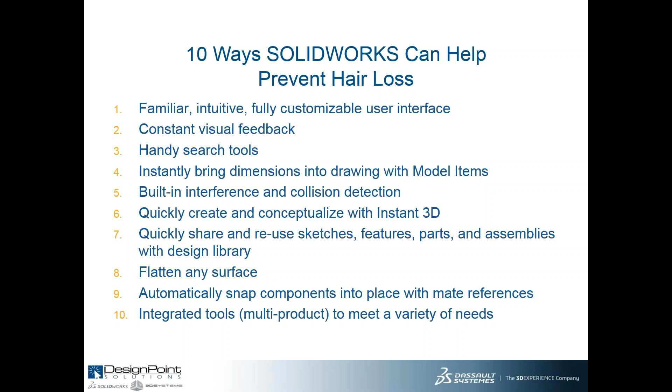Bring dimensions into drawings with model items. There are built-in tools for interference and collision detection. And you guys can see the rest of the list and get the gist, right? So just ways that SolidWorks will make your life and job easier and help you work more efficiently with respect to CAD design.

For the purposes of today, Loretta's going to dive into a few things on the technical side, but basically what we're going to be doing specifically in SolidWorks is, as far as part design process, Loretta's going to be designing a bike pedal. The next step is she's also going to document that bike pedal, and we're going to create a 2D drawing. And we're also going to insert that bike pedal into the assembly, which in this instance is a bicycle. We're going to use some of the built-in interference detection tools to ensure manufacturability and ensure that this product does work as it was initially intended to.

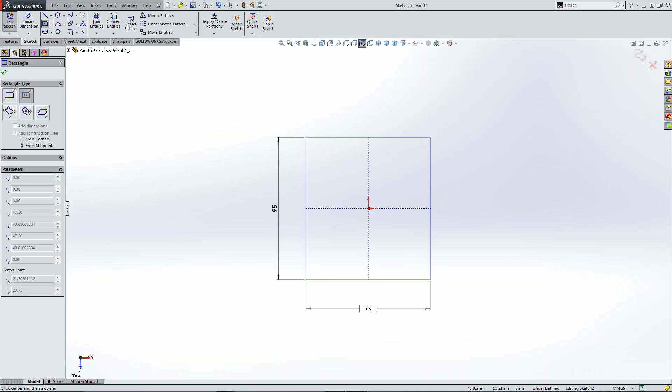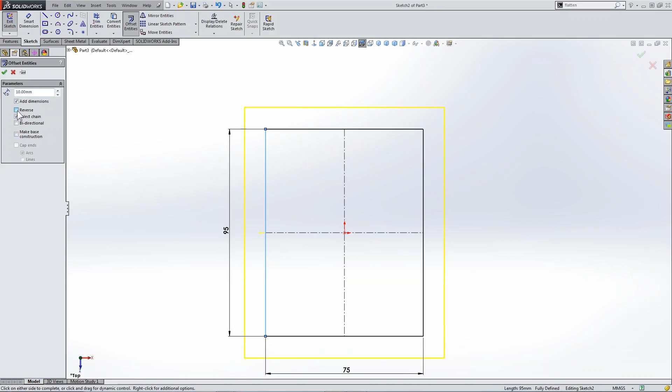So I'm going to add some dimensions to this on the fly. This is going to be a 95 by 75 rectangle, and I'm just going to offset that very quickly. Again, using my shortcut key, I can quickly find the command to offset my entities. I select one, and SOLIDWORKS selects the rest of the entities connected to that for me. You can just reverse that very quickly, hit OK, and now we're starting to build up our bicycle pedal even more.

Okay, so now we're going to work on the middle section of this bicycle pedal. Again, I'm just going to hit my shortcut key to bring up the command - it's a very quick thing to access. And I'm going to add 2 lines in here.

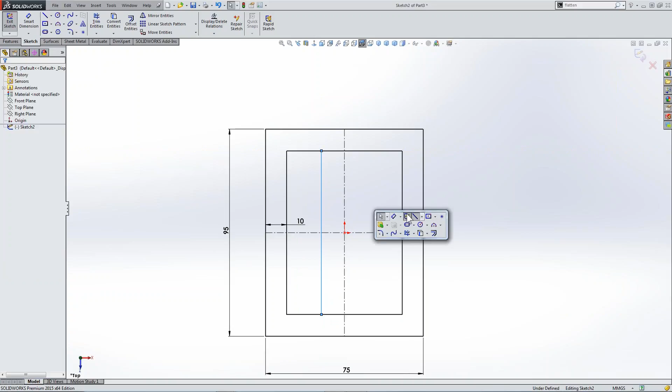Now, as I'm sketching here, you might notice I'm getting some visual feedback - these lines are black while these lines are blue. What that means is that these parts of my sketch are not fully defined. You can see I can drag them around and do all kinds of things with them, whereas these black parts of my sketch are fully defined. So if I grab and drag, it doesn't change. We need to add some more information here to make it fully manufacturable, to give it the information we need.

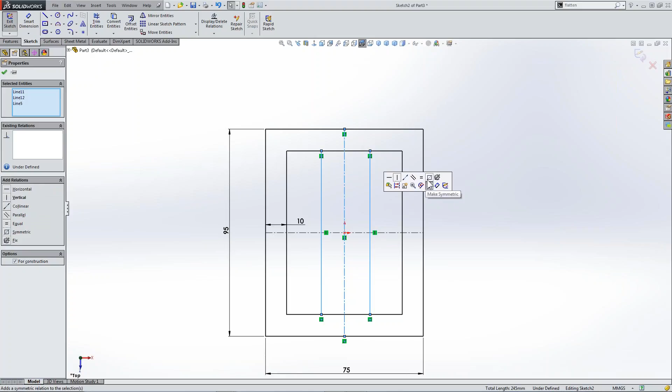So I'm going to just select 3 lines, and I want to make that symmetric. If I select 3 lines at a time, there are these in-context menus that SOLIDWORKS gives us - it's intelligent enough to know that we might want to add one of these relationships to those 3 sketch parts. I'm going to make this symmetric. Now that I've done that, if I drag my line around, you can see that it maintains that symmetry for me. So again, I can very quickly add in those relationships.

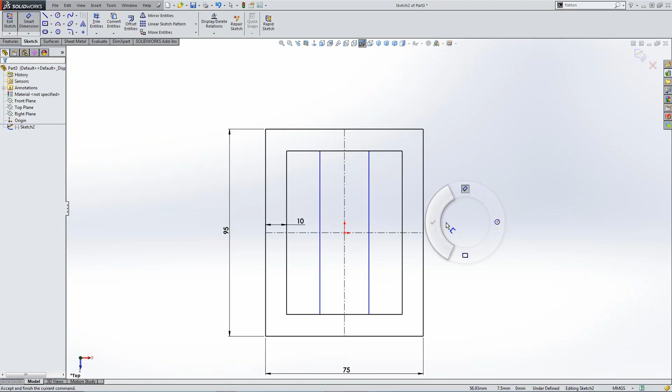The other thing you're going to see during this demo is that I'm using something called mouse gestures. If I right-click and drag up or around, I can very quickly select some of my most commonly used tools - this is my dimensioning tool, which I use all the time. All I'm doing is right-clicking and dragging up, and now I can click on these lines and give them a dimension to fully define them. As soon as I add this dimension, you'll notice parts of my sketch have turned black, which means it's completely defined.

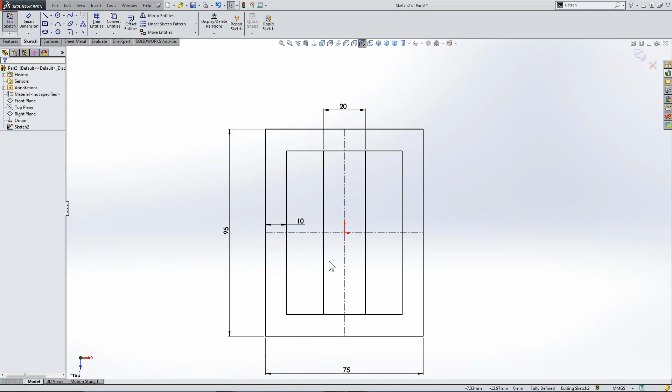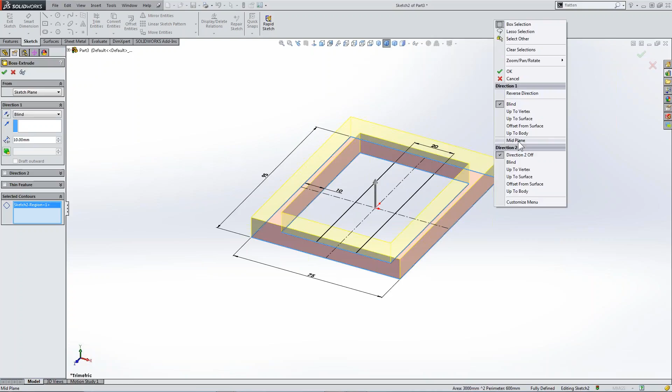Now we're ready to actually move on to give it some thickness. I'm just going to activate my command here, the extrude command. At this point, SOLIDWORKS allows us to select contours of our sketch, which is really cool. So we can select maybe just the outer edge here, and let's give it a mid-plane relationship. Now because we have instant 3D turned on, we can just drag this up and snap it to a ruler so that we can quickly give this some thickness.

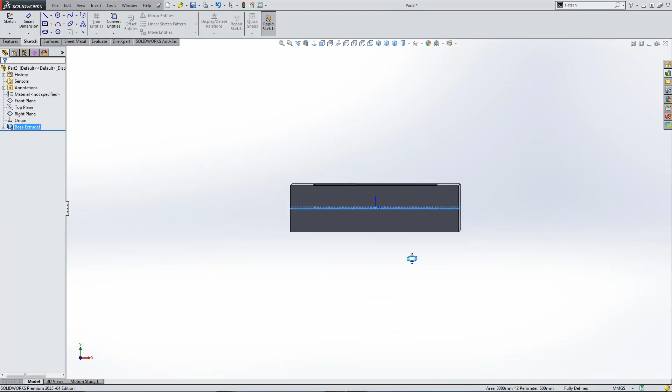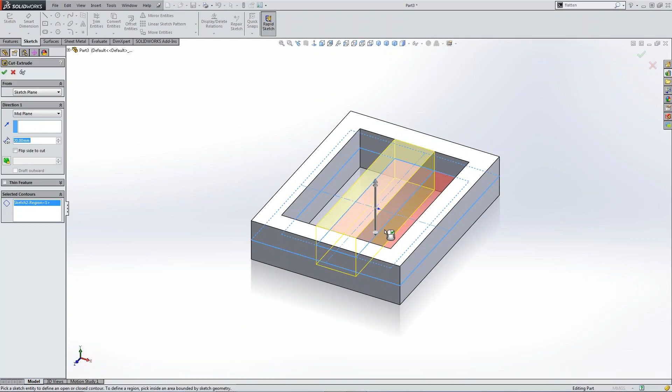Okay, so we've got part of our pedal now. Now we want to use that sketch again - all we have to do is find it in our tree, select it, and we can extrude it a second time, selecting some different contours. So we can put all the elements we need into one sketch and then just extrude parts of it at a time. I'm going to make this mid-plane as well, and again I can just drag this out until I get to the correct thickness.

Oh, I used a cut extrude instead of a boss extrude. So I'll select my sketch and give it some thickness.

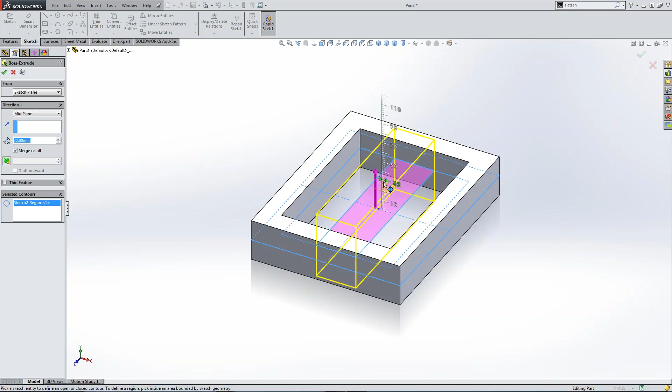I was taking material away instead of adding it in. Using mid-plane, let's just drag this up to about 20 here. Right-click to accept, and that's how easy it is to do that.

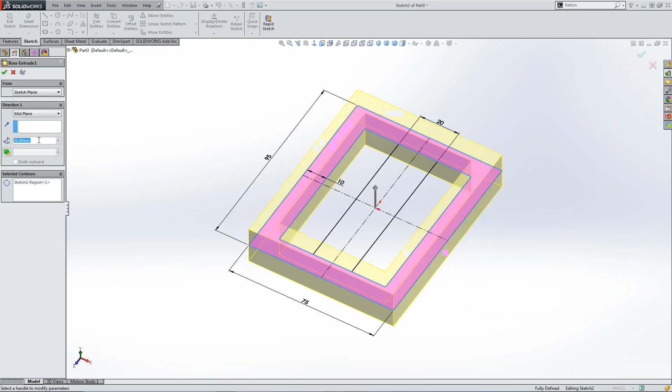The other thing that's really easy to do is make a design change. I made this all the same depth, but if I want to change that, I can just go to my tree, edit the feature, and maybe extrude that to 30. Say OK, and the change is applied very quickly here.

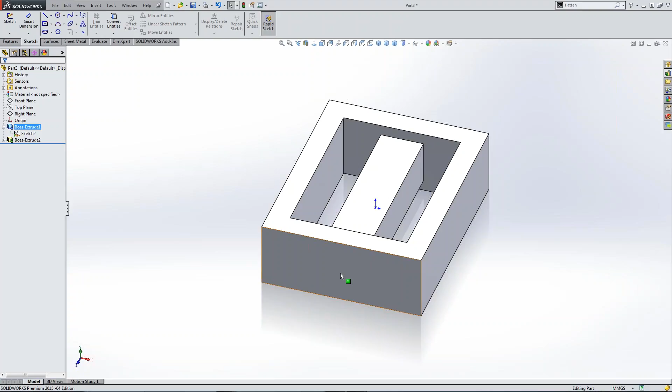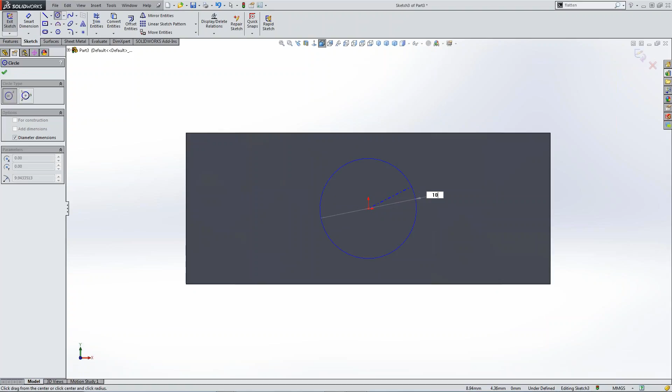So we've got kind of a pedal shape going on. We need to have a hole so we can connect this onto our bicycle. One of the things SOLIDWORKS does really well is allow you to create sketches on faces rather than on planes. If I want to create a sketch on this face, all I have to do is click on it, and it gives me this in-context menu that lets me create a sketch on that face. I'll go ahead and say OK. Using my shortcut key, I can very quickly sketch the outside of a hole, and then pull this into our model.

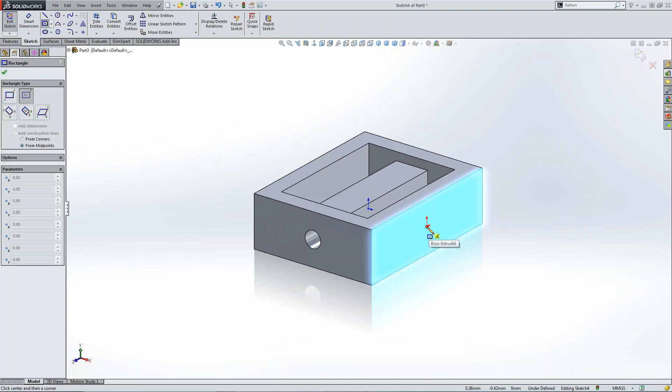We also want to add some areas where we can have reflective tape, so I'm going to create another sketch on this side. Notice how quickly I'm doing this, adding dimensions on the fly, and just extruding it in. Okay, so it's looking pretty good now.

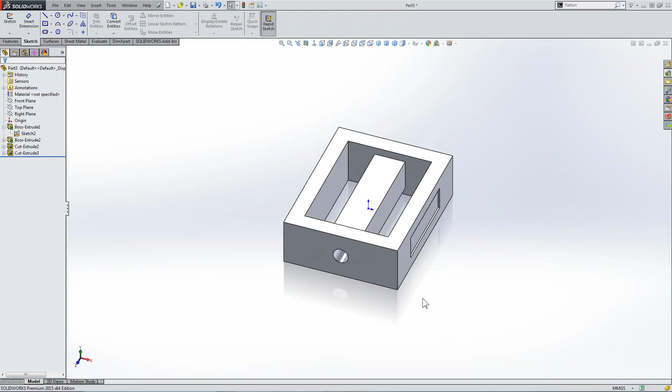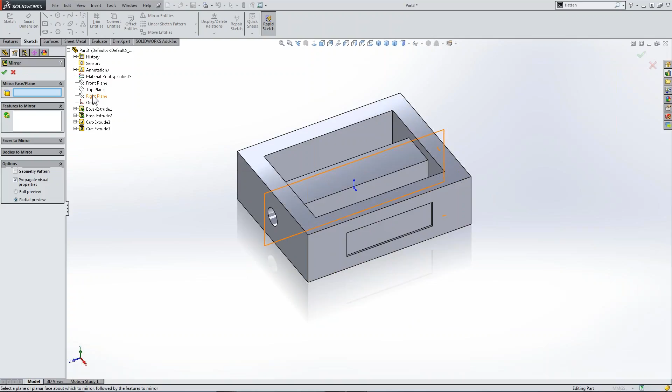This feature we actually want to mirror over to the other side of our pedal, and we can do that very quickly. We're just going to activate our mirror command, select the right plane—notice it gives us visual feedback so we can tell which plane is which in relation to our model—select that cut extrude, and accept it. You'll see now it's mirrored to the other side of my part.

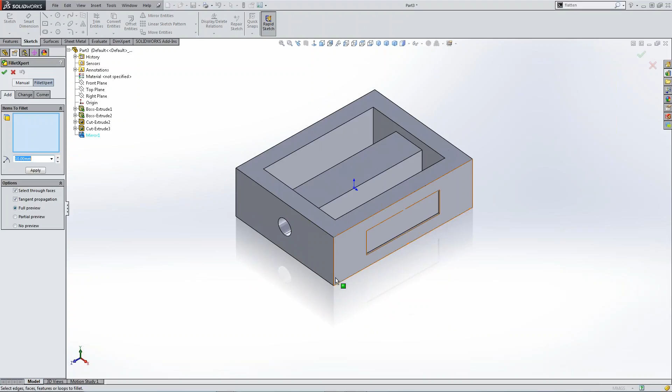The last detail I want to add onto this pedal is to round these edges so they're not sharp anymore. I'll grab my fillet tool, and if I select one of these edges, SOLIDWORKS is intelligent enough to let me select other faces and edges as well. We're going to select all of the edges connected to the starting face here, and we can fillet all of those at the exact same time.

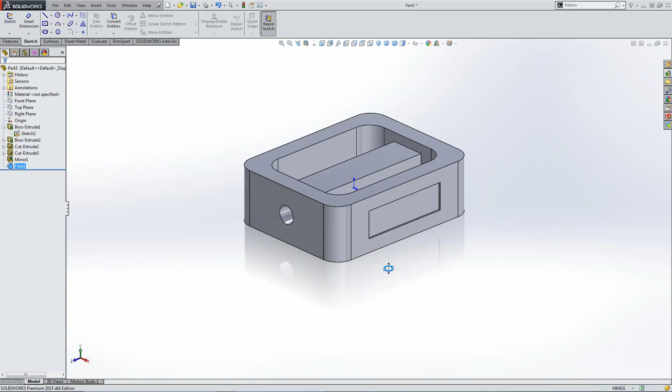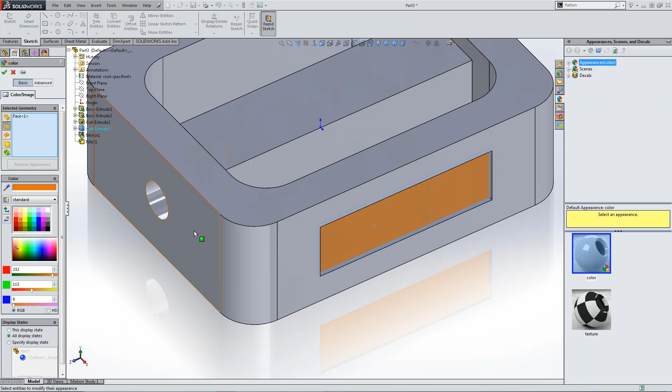Now let's make this model pretty. It's pretty much done, but I want to add in some color so we can make this reflective. I'm just going to edit the appearance of that, right in my modeling area. I'll select that face, maybe choose an orange color, grab the face on the other side, and I'm good to go.

Maybe we want to apply a black color to the rest of the model. For the whole part, we'll just give it a dark gray. That would be nice. Okay, so at this point we're actually done modeling our pedal.

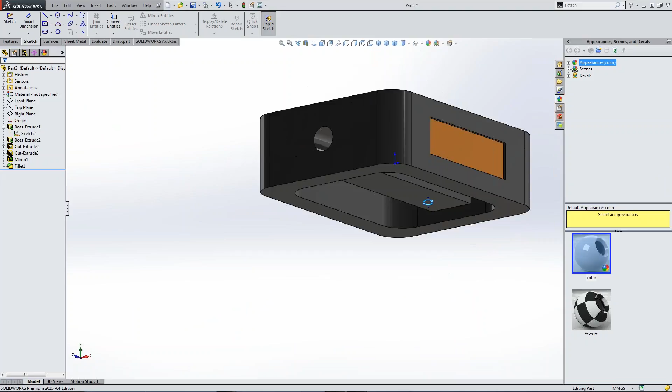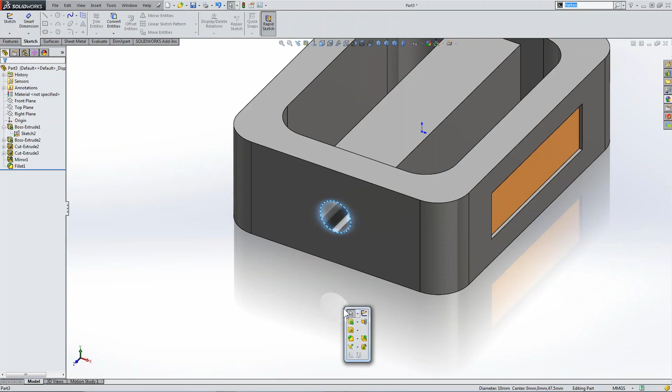It's very fast. What I'm going to do here is add in something called a mate reference, which will help us when we get to the point where we're actually adding this to our bicycle model. If I just select this edge here, I can tell it that this is what I want to use to attach to the rest of the model, and that's all I'm going to do. You'll see how that works in a couple of minutes when I'm actually putting this into the bicycle model.

Okay, so at this point I'm just going to save my work. I'm going to call this pedal. Save it.

So what we saw there was that the workflow is simple and intuitive with SOLIDWORKS. It's actually a really easy tool to learn just because it is so intuitive, and all these menus that pop up intelligently in the drawing space make it easier for you to focus on what you're modeling rather than going up to the left, up to the top, all over the place.

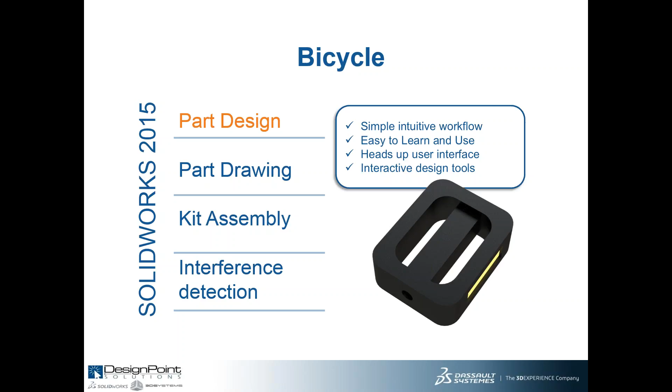Okay, so the next step is to document our design with a drawing. What I want you to notice here is how I'm able to reuse the work that I just did when designing my model to create a drawing that will communicate this to other people.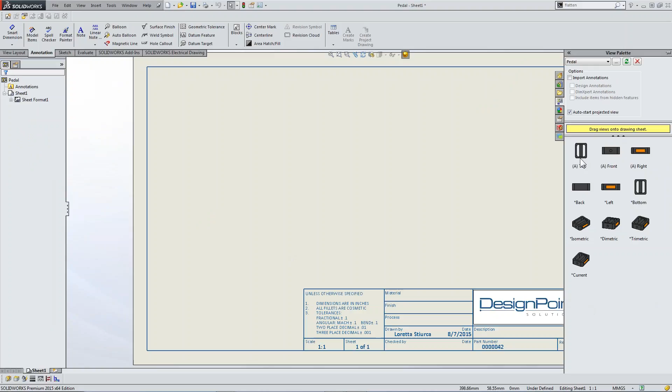Okay, so directly from my model, I'm just going to go and create a drawing file. This is actually linked to my part file at this point in SOLIDWORKS. Now over here on the right, we have what's called the view palette, and it provides us with a bunch of the standard views of our model. We can just take these and drag and drop them onto our page. It's very easy to get started.

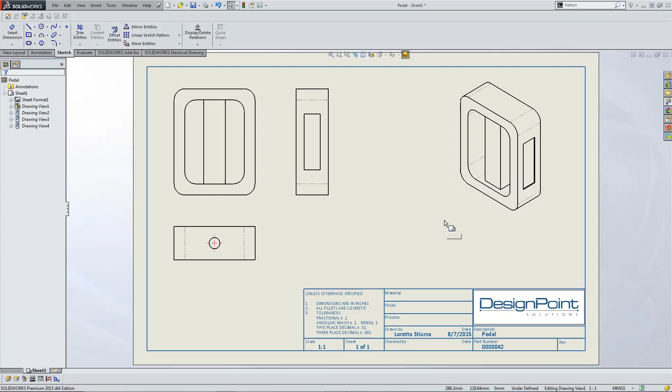Once I've placed my first view, if I drag my mouse around, we can project other views off of it. So very quickly I can get all of the views that I want on my page, and that's it. Okay, so maybe we want to change the way that we're displaying one of them, isometric. Maybe we'll make it shaded.

And at this point, we're ready to add dimensions to our model. Now we actually already added a bunch of dimensions when we were modeling the parts. So SOLIDWORKS gives us this really awesome tool called Model Items. I also have that here on my shortcut panel, and that allows us to import all of the dimensions that we added to the model into our actual drawing.

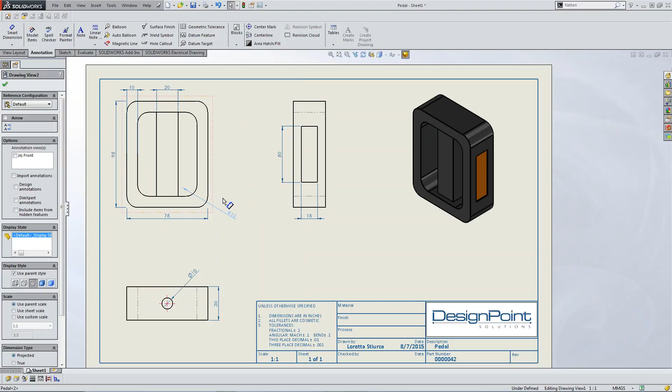So I select all of these, and I can go ahead and clean that up a little bit. Now we're mostly done doing our drawing. Now this is huge. For those of you that are already doing drawings, you know this is a very time-consuming task. So getting this head start on the drawing is going to save you a lot of time.

Well, maybe at this point we want to add in a couple of other dimensions. So I'm going to use my mouse gesture to grab my dimension tool again, the same one we were using in SOLIDWORKS, and add in a couple of other things here. Maybe we want the width of this, and maybe we want a little detail on this view, so we'll just change the way that it's displayed. And we can add in, for example, the width of our hole there, and the depth of this.

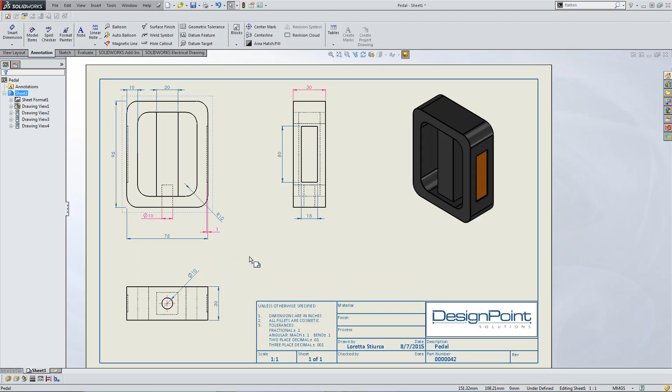Now, the other thing we can do from the drawings, since we're using model items, and since the model is linked directly to the drawing, is that we can actually make design changes. So if I edit, for example, the width of this here, and I change it to 50, I rebuild, I can see that change applied to the model. If I go back into that part file we were just working on, I can see that change applied there as well.

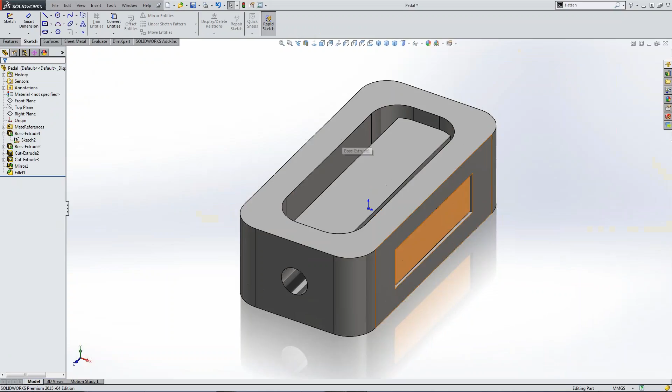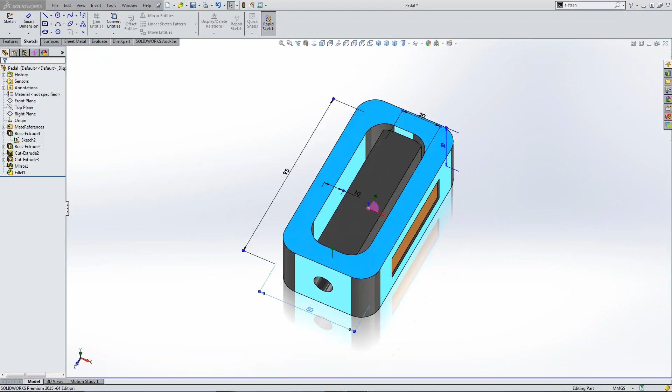So everything's up to date between the two documents, and we're not having to go back and check the model and update the drawing or redo the drawing. We just make a change in one place and it applies across the board. So I'm going to change this back to 75 here, and let's see how it goes the other way. Go back to the drawing. Again, everything is up to date, exactly how I want it.

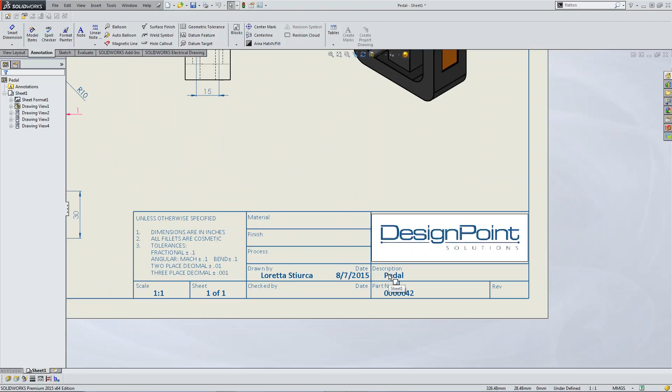Now that's how easy it is to create a drawing in SOLIDWORKS. And you'll notice this is all placed in this beautiful template here that I've created, and that was automatically imported. You create it once, it's linked to properties of your model or of your document, and everything is up to date there as well.

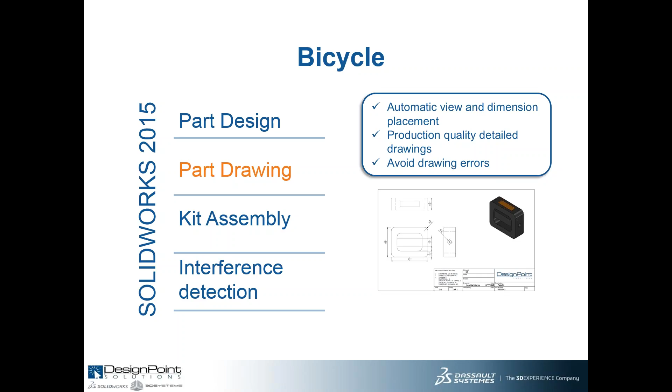Okay, so let's move on and take this pedal and actually put it in an assembly, a bicycle assembly.

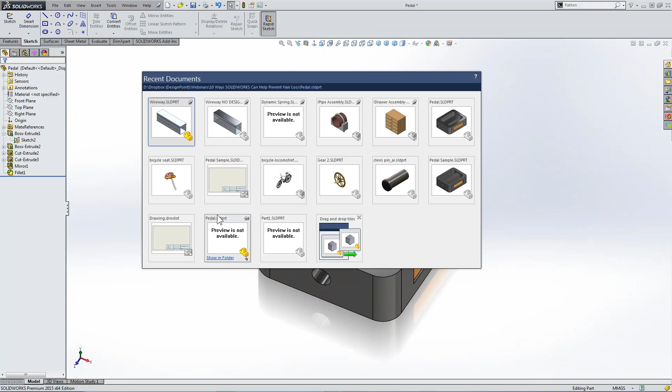Okay, so back to our pedal, I'm going to go ahead and open up our bicycle. I just hit the R key here, which allows me to access all of my recent documents. I'm going to open up this bicycle I've been working on. You can see I have some components placed in this assembly, and I want to add my pedal in here, on the other side as well. A couple of pedals in here.

Remember earlier I selected this edge here, and I made that a mate reference. This is where that's important.

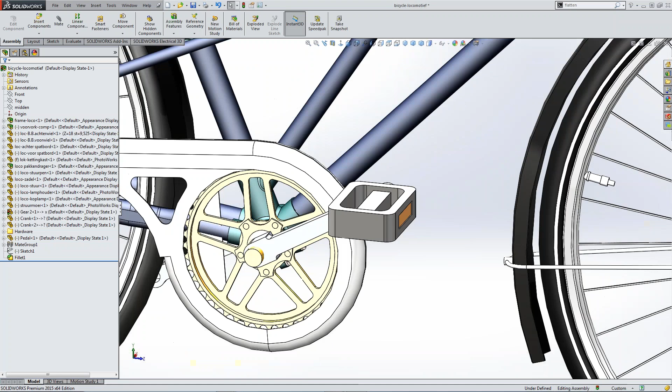So what I'm going to do is go to Insert Components. I'm going to select my pedal, and now I'm just going to drag my mouse over my assembly. You'll notice when I hover over cylindrical objects, it tries to snap in place, which is great. It's actually creating mates, sticking to the model in the way that I want it to. I'm going to place that there, and quickly place one on the other side. All right, so now it's attached there.

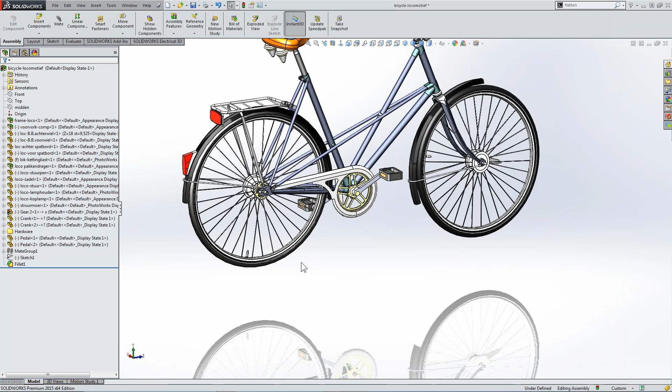Maybe I want to add in a couple of mates just so that it stays parallel with the top plane. If I select two entities, this intelligently predicts which mates I want to add in there. I'm going to grab the top plane, make that parallel. Now let's take a look at how this actually moves. If I drag this pedal around, it's actually turning my back wheel here.

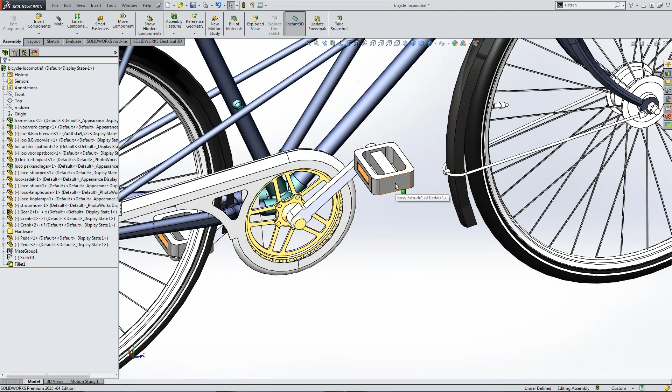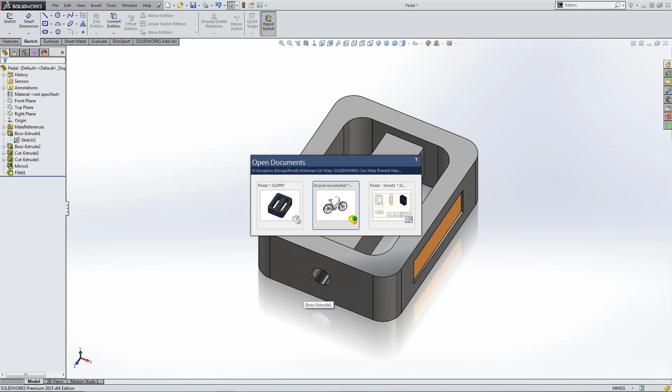It's very easy to add new components into our assembly. The other thing I want to mention is that this has a link to the actual part file. So if I make a change here, maybe change this to 50, both pedals update, right? And if I look back in the part file, it's changed here. So if I make a change back to 75, and I look back into my assembly, everything updates. The drawing, the assembly, and the part document are all in sync with one another, which is really great.

The other thing that's great about SOLIDWORKS that can help you keep all your hair is that it really enables design reuse. There are a lot of different ways it does that. One way is it provides you with this design library tool. If there's a part that you create once and you know you're going to use it all over the place...

You can actually just right-click on it and go Add to Library, and it'll add it into this design library over here in your task pane. So I've added a bunch of different things in here. You can reuse all kinds of things - annotations for drawings, assemblies, features of a part, actual parts. So under parts, I actually have bicycle parts, so I can reuse a pedal or a wheel here.

But the other thing you get with Professional and higher is the SOLIDWORKS Toolbox. The toolbox is basically a library of a whole bunch of hardware parts that you might want to use in your assemblies. So if I open this up, we can see we've got all kinds of things in here - bolts and screws, bearings, keys, jig bushings, pins. So I'm going to grab one of these pins, and let's take a look at how this works.

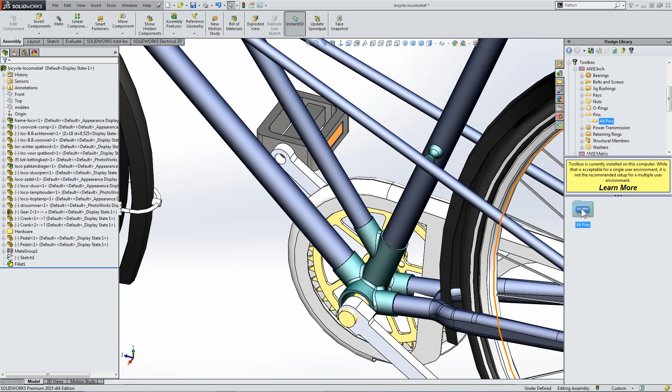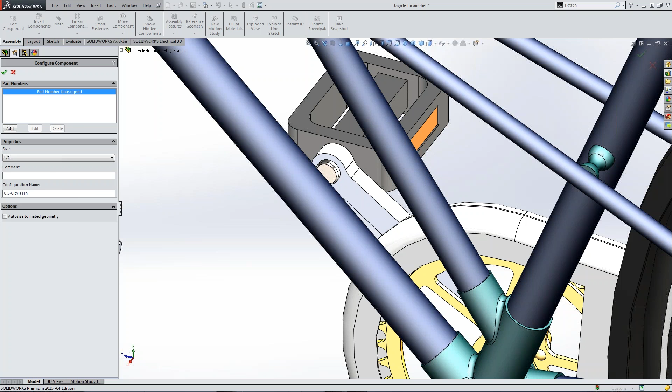If I grab one of these pins over here, all I have to do is drag and drop it into my assembly, and it actually snaps into place using mate references, but it resizes to fit the hole that you drag it on top of. Dragged it there - it has a size that's automatically determined. Hit OK, that's all I have to do. So I've pinned that in place now, and I'm going to do the same thing on the other side. Just hovering my mouse over it, and I click to place it, and that's it. So it was that easy - I just attached these two pedals into my assembly.

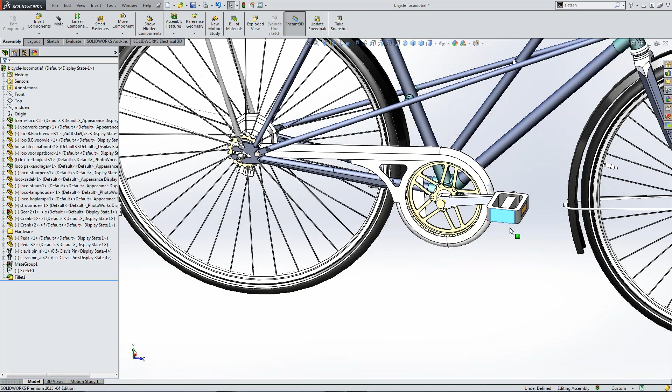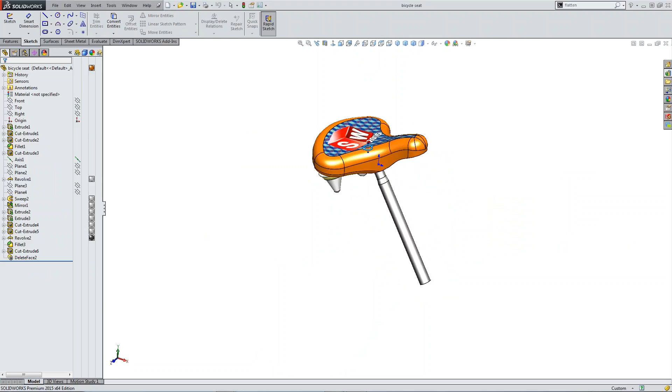Okay, that's kind of a bonus. I want to show you a feature that I love that was added to SOLIDWORKS 2015 - it's called Surface Flatten. From the assembly, we can open up any part with this in-context menu. I'm just going to open up the seat here, and let's say I want to know what this surface is like when it's flattened. I can actually now flatten any surface I want to. Let's say I don't have that command on my shortcut key, and I haven't even used it before - let's pretend. Well, I can actually go up here and just search for any command I want to.

So I'm going to type in flatten, and that command is going to come up. From here, I can either activate it, or if I click on this little pair of glasses over here, I can have SOLIDWORKS tell me where this is located. So I'm going to do that now. It's going to move my mouse over, and it provides a red arrow, so now I know that's located on the Surfaces tab.

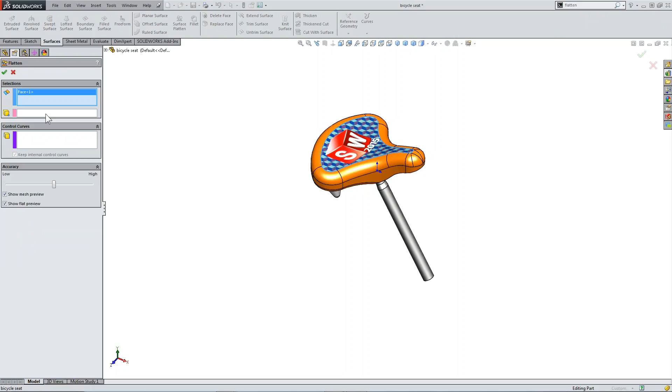So I'm just going to go ahead and activate that command. I'm going to select this surface to flatten, and I'm going to select this point to flatten from, and accept that. Let's take a look at the surface that we just created.

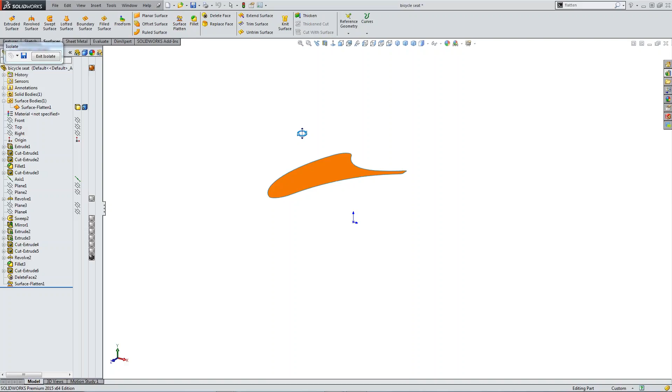So this is fantastic. If we're doing any kind of laser cutting, or we're printing some labels and we want to know what the outline is, we can now take this and print it out, get an idea of what that looks like. I do want to mention we could always do this with sheet metal parts, but it's really cool that now we can do this with any surface we want to.

Just going to hide that. Okay, so that was a little bonus.

Go back into our PowerPoint. So what we saw there was that we were able to very quickly mate everything in place. In fact, some of the mates were added for us automatically since we added that mate reference into the part. We were able to very simply place it and position it. And then the design library in the toolbox allowed us to increase our productivity. We were able to just snap those pins into place, and they auto-sized for us.

So the last thing I really want to talk about is this interference detection, which is built right into the software. This allows us to get an idea of whether or not this is actually ready to go to manufacturing.

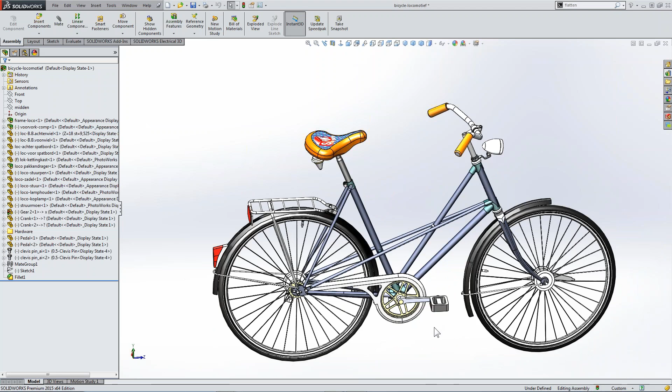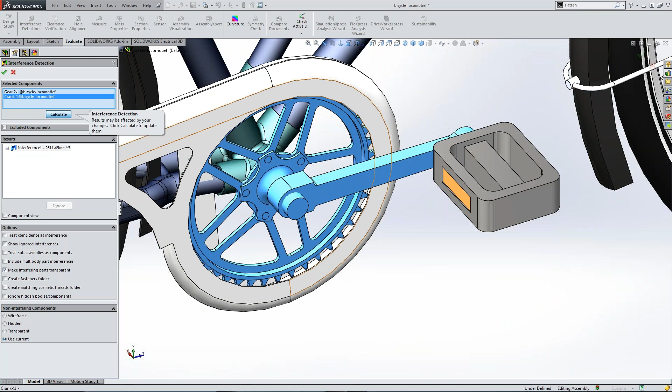Okay, so let's say I want to find out if this gear is interfering with this crank here. So all I have to do is go up to my Evaluate tab, and click on this interference detection option here. From here, I can select the components that I want to detect interferences between. So I'm just going to click this and this, and click on Calculate. And now SOLIDWORKS shows me exactly where my interference is.

So this tells me there's an interference. It actually gives me the volume of the interference. And now we can just make a quick design change and eliminate it.

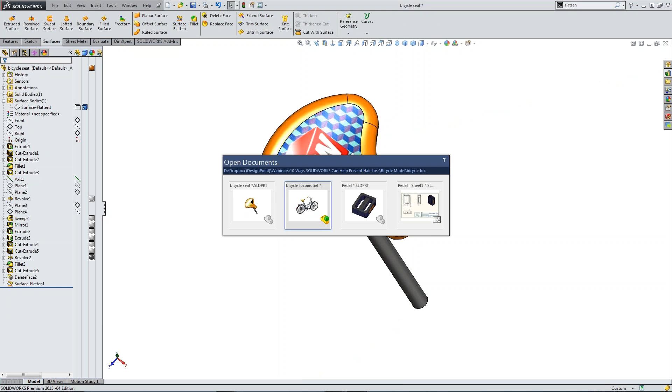So what I'm going to do is I'm actually going to just change the diameter of this here. I'm going to change it to maybe 10. Oh, that's a little too small. So we can see visually that's going to be too small for us. I'm going to change that to 15. Rebuild it. That looks pretty good.

Let's make sure. So I'm going to go back up to interference detection and very quickly select the components I want and calculate interferences. And as you can see here, we have no interferences between those components, so we know that we're good to go with this assembly.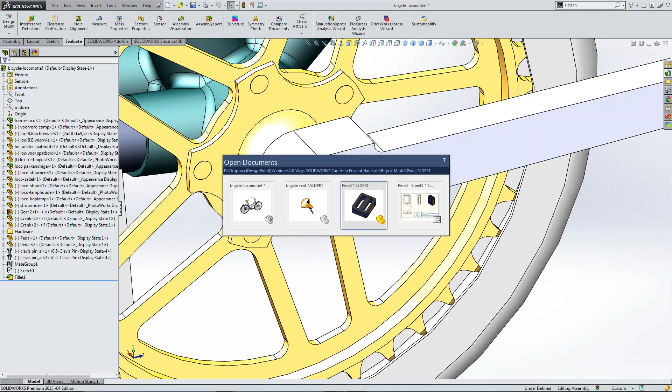So Dan, I'll hand it back over to you. Awesome. Yeah, that was awesome, Loretta. Thanks for running through some of that. Thank you. Yeah, very cool. So the bike works.

Good to see. So yeah, I guess just to kind of recap, you guys can kind of get a sense for the thematic part of the webinar, right? So SolidWorks is a very easy to use and powerful CAD system, and will help you work more quickly and efficiently. So things like the interface and customizability.

You saw Loretta use the mouse gestures feature to use some of her commands in the context of the design environment. So huge time saver there, as you can imagine. And you can customize something like that to include whatever your top list of features or capabilities are. And Loretta's factored in some things that she uses and how it applies to the way she designs in SolidWorks. You also saw the mirroring feature, adding multiple fillets to the pedal relatively quickly.

And one thing I don't think we necessarily touched on, but is interesting to note, is the easy 2D drawing generation, but also some of the associativity features. So as you make updates and changes to your 2D drawing in SolidWorks, it in turn makes updates and changes to your 3D model, and vice versa. So changes to your model are also reflected in your 2D drawing, which is awesome.

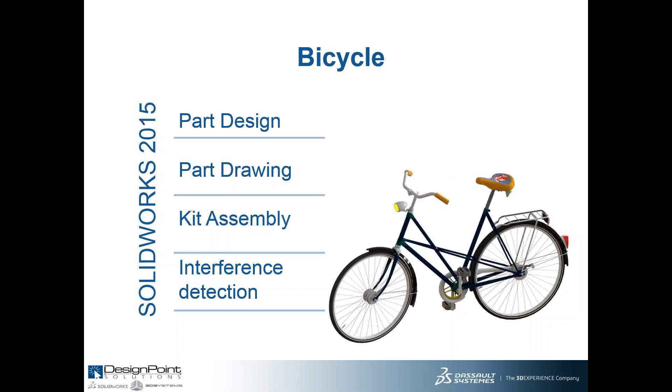Just in case you guys weren't aware, this was a SolidWorks CAD-centric webinar, but they really do have solutions for every stage of your design process. So outside of strictly CAD, there are tools for technical documentation and creating assembly instructions, tools for simulation, running FEA studies, structural tolerance analysis, frequency analysis, things like that, to get an idea for how your products will perform in a real-world environment. We have an upcoming webinar on data management specific to SOLIDWORKS EPDM, and SOLIDWORKS for electrical design as well. So just as an FYI to you guys, it really is a tool for every stage of your design process.

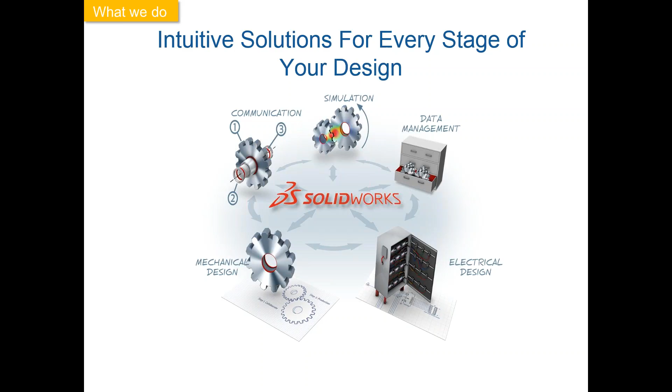I am not seeing any hand raises, so I'm assuming we've all wowed you. Looks like we have a question coming in. During interference detection and modifying one part to fit with another, can you make it relational? Okay, let me just pull that up. Give me one second. We had a couple come in. I can see a couple more questions here. Yeah, I've seen them coming in too. Okay, I see one of them, but I'm not sure I understand that first question.

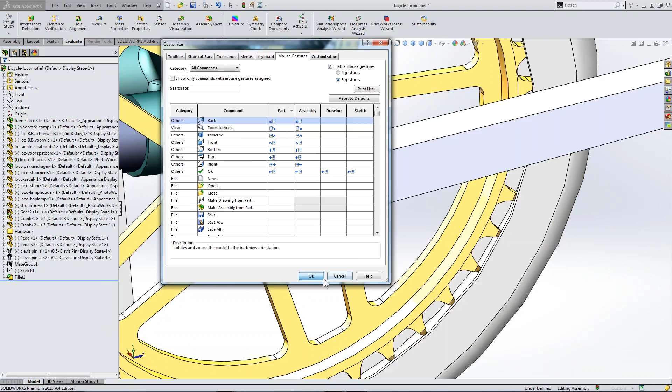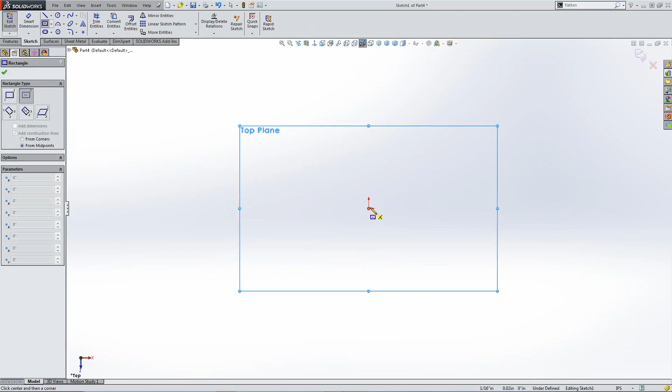Great question - when putting dimensions into a sketch, can you enter the value in a different unit scale than the default for the workspace? Absolutely. So if I create a new part here, I'm in inch/pound/second units, and I create a sketch here. If I want to, I can add a dimension, and instead of putting it in inches, I could put 15 millimeters and it'll convert that for me. Now if I wanted to make this segment equal to this segment, all I have to do is select the two, hit the equal relationship, and it'll automatically pop that into place.

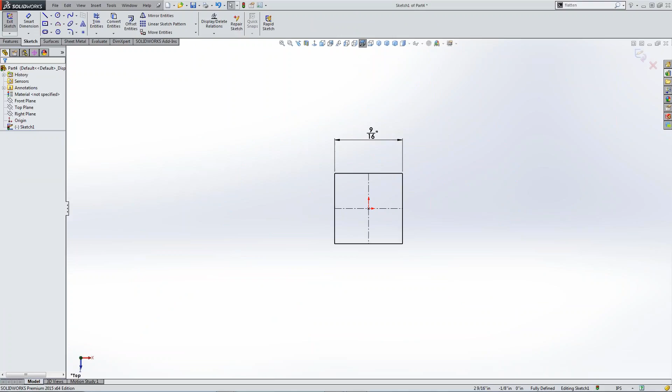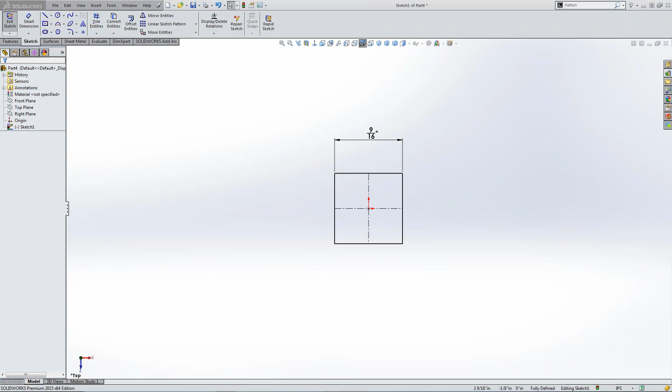No problem, Chris. And yeah, sorry Tom, I saw the second part of your question: during interference detection, modifying one part to fit with another, can you make it relational so that you can set one diameter equal to another without value entry? Yes, you can. So in this case, what we could do is edit this part in the context of the assembly, find the diameter here, say equals, and find the diameter of this other feature. I can take this and set it equal to a dimension.

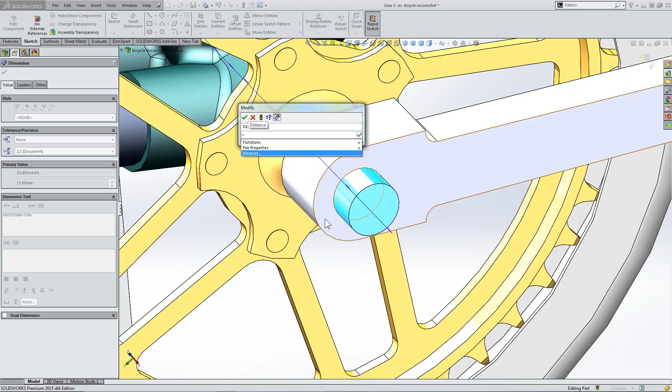Open this part. The short answer is yes. I think I just didn't actually add in the diameter into this piece. So if you don't add the diameter into it, it's a little trickier.

But the short answer is yes, you can do it. Great question. And obviously, Tom, if you do have more specific questions that we can't necessarily dive into on this call, feel free to reach out to myself or Loretta, and we can take that question offline if you'd like.

Sure, Eileen. So I'm assuming that you're asking about Windows 10. We haven't gotten confirmation yet as to whether or not 2016 will be compatible with Windows 10. We are still waiting on confirmation for that. My recommendation at this point, Loretta, let me know if you disagree, but would be to hold off on installing SOLIDWORKS on machines with Windows 10 until there is official word from SOLIDWORKS on compatibility. We're expecting that it will be, but we're just waiting on official confirmation.

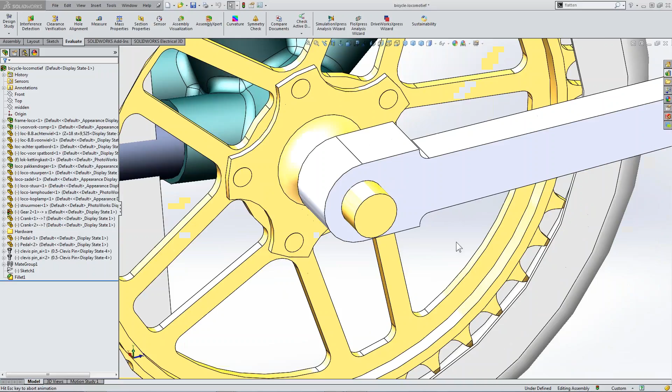Cool. Okay. Any other questions that you guys have at this point? I appreciate the ones you've asked already. We'll take another maybe 30 seconds. If you guys do, I think I saw Bob. Bob, did you have a question? I think I saw another hand raised.

Okay, all right, cool. Okay, Tom, can a toolbox pin create the hole in same placement depth? Can Toolbox create the hole itself? You wouldn't do that through Toolbox.

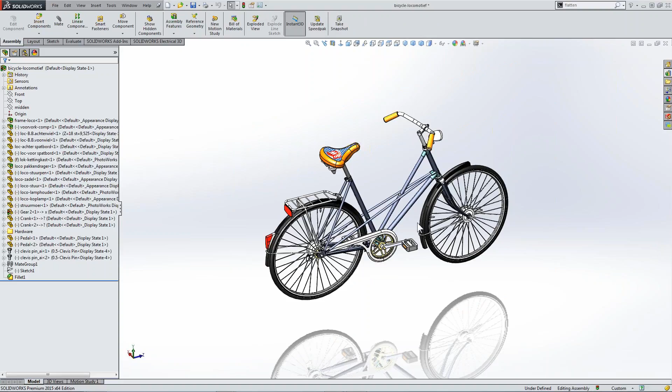What you would do is you would use something called Hole Wizard. So under assembly features, there's this Hole Wizard command, and you also have Hole Series. Those are two really powerful commands that will allow you to add your standard hole sizes in, and then just drag in your hardware into that hole, and it will cut it for you. There is another feature - you can create a smart component that will actually cut into your model at the same time as being placed. So there is potential there for that.

Great question. Thank you. Okay, cool. Cool. Appreciate the questions, guys. Another one coming in. See that one, Loretta? Yeah. Including a hole wizard feature.

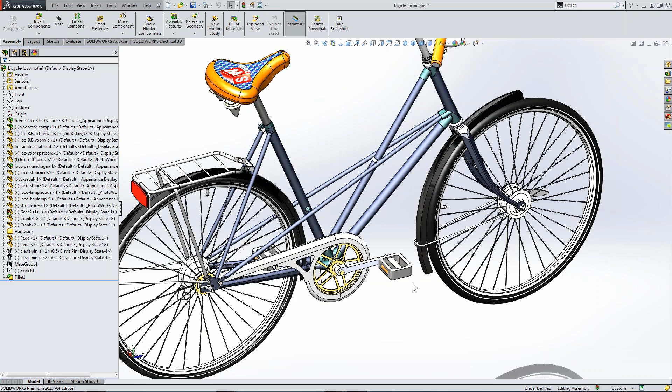You would want to add the hole first there. Yeah. Cool. Yeah. Appreciate the participation, guys, and definitely all great questions.

So obviously, Loretta, thanks again for taking the time to run through. Oh, another question. Dimension. Trying to do the dimensions. Yeah, Bob, I see your question. I'm thinking that there might be something. Let's take that question offline. I can give you a call after this, and we can take a look at it together.

And Tom, if you do have more specific questions, feel free to call into support. One of our application engineers can walk you through that in more detail if you do have more specific questions outside of what we were able to answer now. So definitely feel free to give a ring in support if you have any other questions specific to the Hole Wizard feature and that sort of thing. We'd be happy to help you.